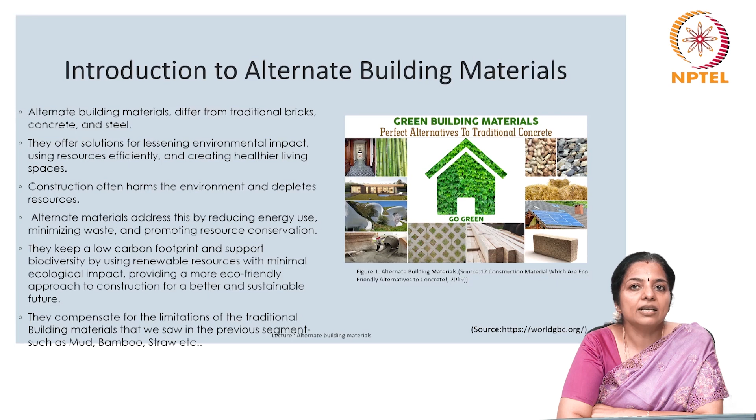These materials will help us reach carbon neutrality. They compensate for the limitations of the traditional building materials which we saw in our previous segment, such as mud or bamboo, straw, etc.

Now, why must we go for alternate building materials? Why should we do it? First, the market for alternate building materials is primarily driven by rising public awareness of environmental issues and new government regulations requires the use of sustainable building materials for infrastructure projects. So once you give an option to people or the client for building with sustainable building materials versus conventional energy-intensive building materials, the awareness is pretty high, especially because of the green labeling system.

In comparison to typical building materials, alternate materials have low carbon emissions and take less energy for production. That is because most of the time there is a large component in these building materials which is either waste or locally available. Either way, the end product is a low carbon emitting building material. They are therefore perfect as an alternate building material and are very environmentally friendly.

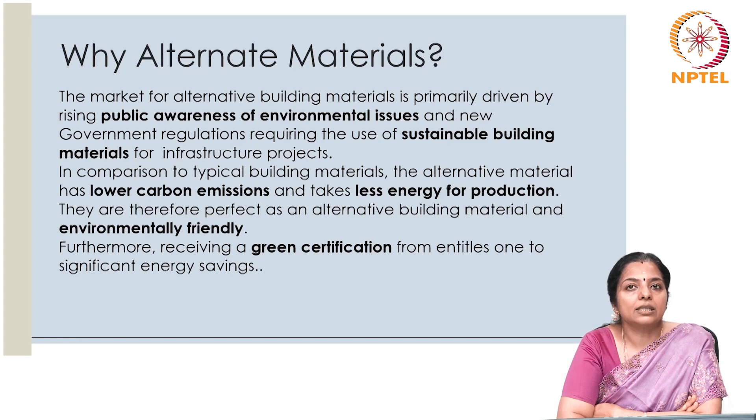Further, receiving a green certification from certifying bodies also results in significant energy savings. A combination of all this has really created a market for alternate building materials.

There has also been an increase in environmental awareness around the world due to climate change, which we face on a day to day basis. We see sudden downpours on cities, the clouds literally standing over cities and pouring down, attributed to the urban heat island effect, which again is attributed to using urban climate as a heat sink, which is attributed to the design of buildings that are not climatically suitable, which again bounces back to the envelope building material, the walls and the roof. Therefore there is intense awareness about the building material choices we have to make, because these end up becoming directly related to climate change.

Now, in order to conserve natural resources and avoid adverse effects on climate by using materials that emit ozone-depleting gases while manufacturing, or which are very carbon intensive, we must, in addition to alternate building material, also consider green materials that are relatively eco-friendly.

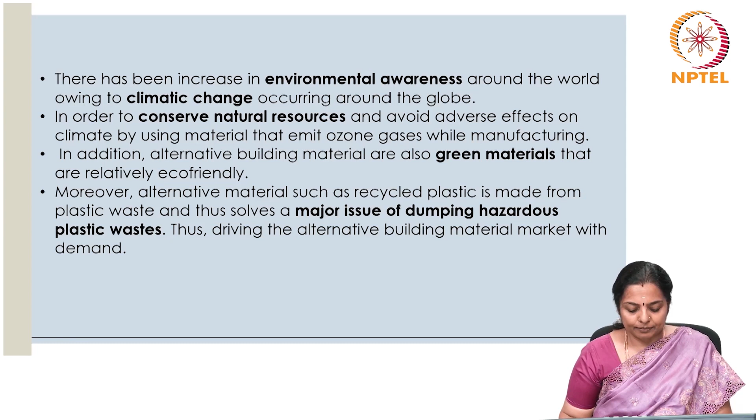Now, the alternate building material market demand is segmented on the basis of materials, end user, application, and region. In general, there is a demand for alternate materials with time for the reasons we have already seen. In the construction industry, there is a projected rise in demand of alternate building materials between the year 2020 and 2030.

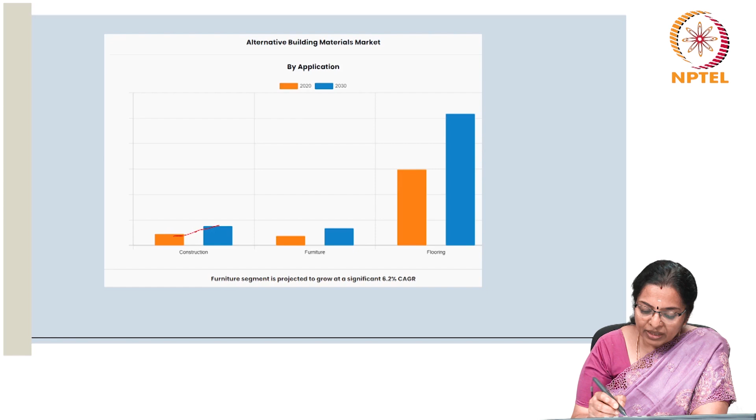The furniture segment is also showing a rise in demand. With respect to a particular component, the flooring element is also showing a significant demand in alternate building materials between the year 2020 and 2030.

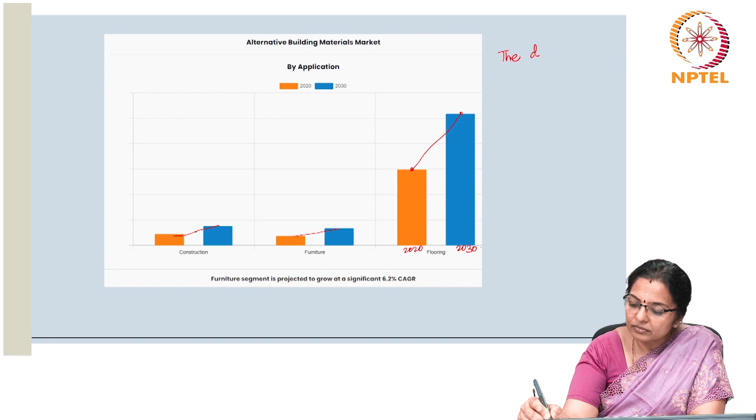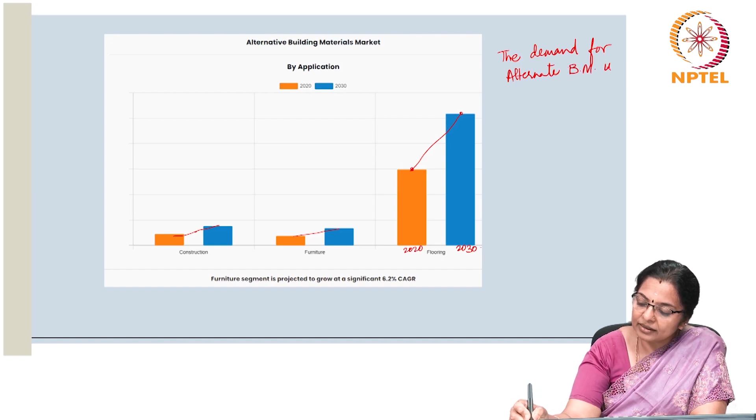So we can confidently say that the demand for alternate building material is rising year on year. We established that.

Now let us look at how these alternate building materials are classified. There are three ways in which we can look at alternate building materials.

First is natural materials. In combination with modern materials, natural materials are used as a composite. So it is not just purely mud, but mud with cement, which means it is a combination of a traditional building material and a modern building material. When you do this, you reduce the limitations of using only natural materials, and therefore its limitations in terms of strength and durability can be diminished.

For example, bamboo, a versatile and fast growing grass, is known for its strength and sustainability, but it has other weaknesses in terms of its durability over time, because whatever said and done, it is an organic material. So we can use modern technology to reduce the impact of its questionable durability. Rammed earth involves compacting natural materials like mud or soil to create sturdy structures.

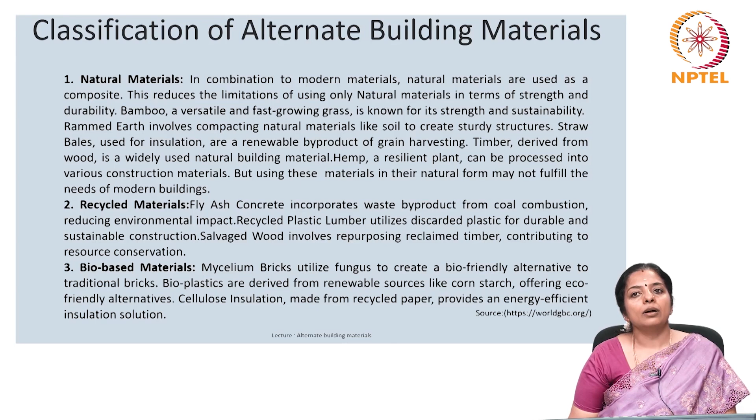Bioplastics are derived from renewable sources like cornstarch and offer eco-friendly alternatives. Cellulose insulation, made from recycled paper, provides an energy efficient insulation solution.

Let us look at some of the examples.

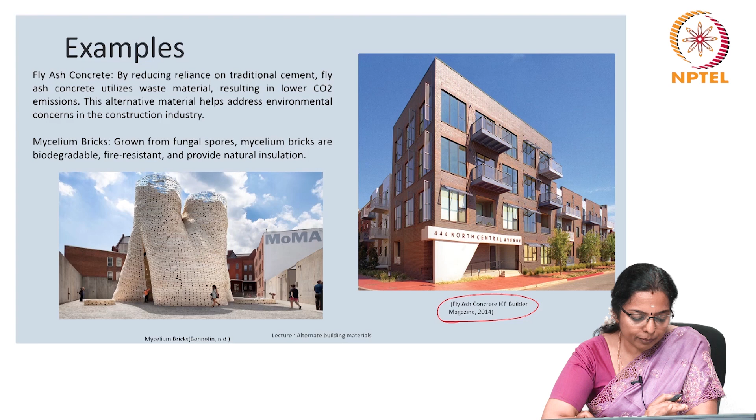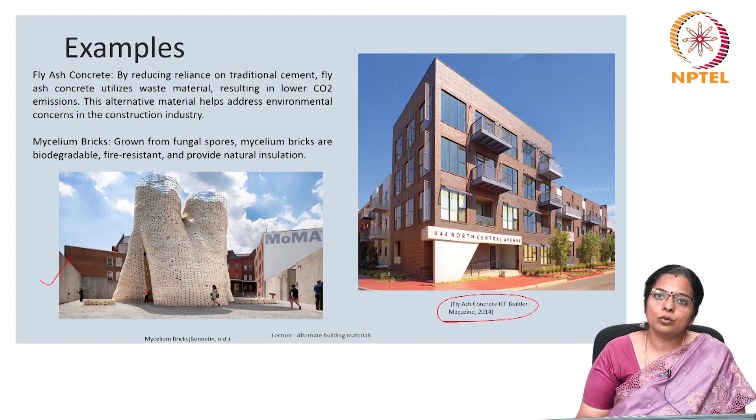Mycelium bricks are grown from fungal spores. They are biodegradable, fire resistant, and provide natural insulation. There are structures made of mycelium bricks. For example, this installation is made out of mycelium bricks, and it is only a question of time before we can bring it into the mainstream building industry.

Now, let us look at the most important aspect that we need to understand and follow, which is carbon neutrality or carbon negativity. What are the characteristics of these alternative building materials?

Carbon negative building materials are a pioneering innovation in sustainable construction. These materials represent a pivotal shift from traditional counterparts, actively capturing and storing more carbon dioxide than they can emit throughout their production and life cycle.

These are sourced from renewable and sustainable resources, and these materials minimize the environmental impact by prioritizing low embodied carbon and adhering to circular economy principles, thus emphasizing recycling and minimal waste.

The integration of innovative technologies such as carbon capture and utilization further enhances their carbon negative characteristics. Durability is a key focus, ensuring that the captured carbon remains sequestered over an extended period. Rigorous life cycle assessments validate their net carbon impact, providing transparency and accountability.

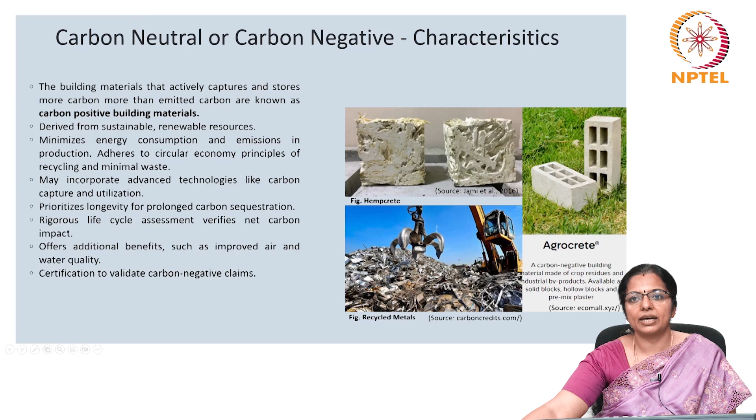Let us look at the advantages of alternate building materials. First is improved health and well-being. Alternate building materials offer several advantages. Firstly, they contribute to improved health and well-being, as many of these materials are non-toxic and sometimes even breathable. They create a healthier indoor environment for the occupants.

Secondly, these materials enhance energy efficiency by providing improved thermal insulation, thus reducing the need for excessive heating and cooling energy. Additionally, they open up possibilities for integrating renewable energy sources into construction.

Thirdly, alternate materials often exhibit excellent structural and functional properties, enhancing the durability and overall performance of buildings. Lastly, these materials bring unique visual characteristics to construction projects, allowing for innovative and aesthetically pleasing design solutions, more so because they do not follow the regular aesthetics of modern and conventional buildings.

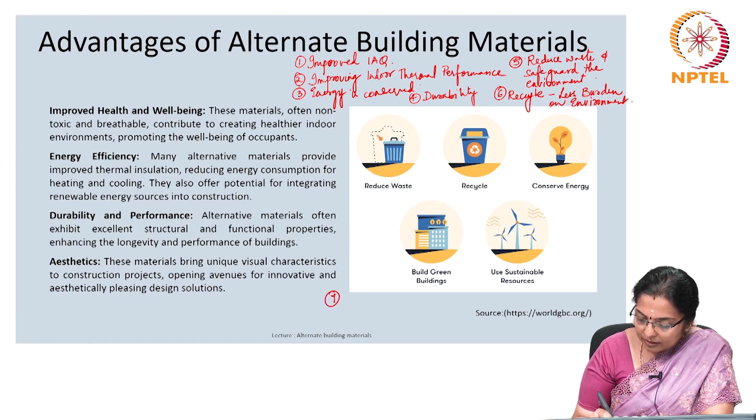Also, it can be an innovative approach for green building certification, and definitely a step towards going carbon neutral.

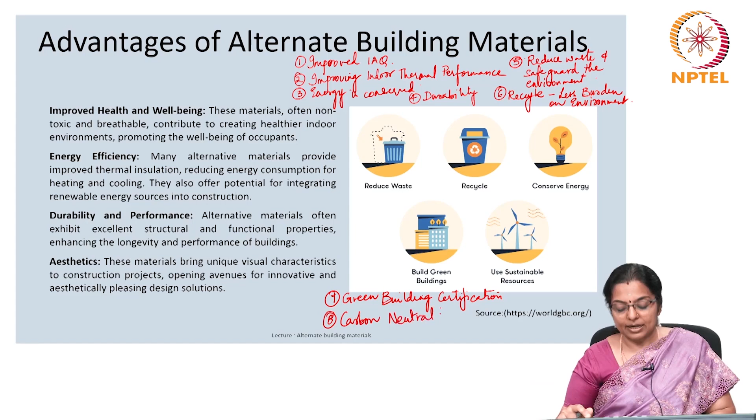So, these are the advantages of using alternate building materials. While its disadvantages can be the cost, limited availability, lack of expertise to construct these buildings, and impingement of building codes and regulations, which may not be too accepting of something very new.

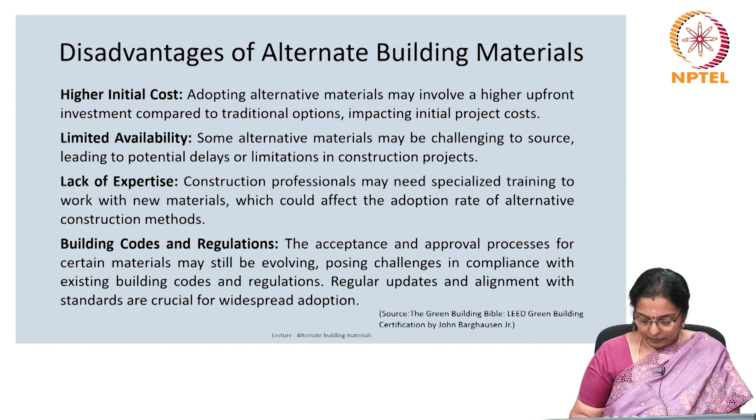Now, let us look at the environmental aspect of alternate building materials, because it's the focus of the course. Alternate building materials play a very crucial role in promoting sustainability in construction. They contribute to reducing the carbon footprint of buildings by having lower embodied energy and showcasing carbon sequestration capabilities.

They also support the creation of environmentally sustainable structures. These materials also promote resource efficiency by utilizing recycled content and renewable resources, thus optimizing the use of resources and aligning with eco-friendly construction practices.

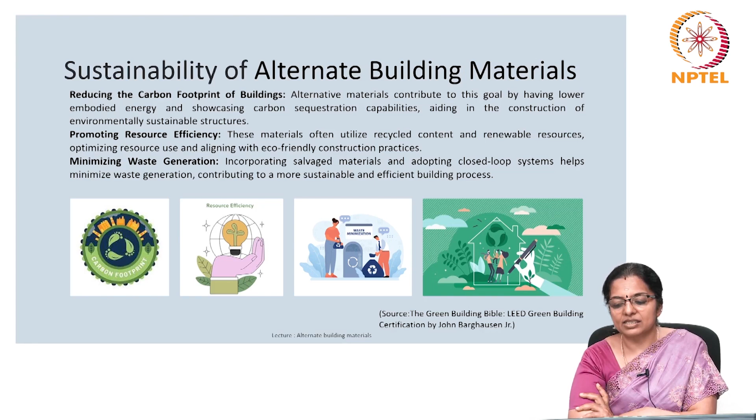Additionally, incorporating salvaged materials and adopting closed loop systems help minimize waste generation, further contributing to a more sustainable and efficient building process. So, in terms of sustainability, the gist is that these building materials help in reducing the carbon footprint of the building. They help in promoting resource efficiency because of the recycled content, and they promote minimizing of waste generation, because materials which are dumped as waste are salvaged and brought back into the loop of usage.

We will quickly see case studies of alternate building materials in general. Now, the Indian Plywood Industries Research and Training Institute, IPIRTI, actively promotes bamboo in its construction, emphasizing bamboo lumber as a processed and treated bamboo variant which is suitable for structural purposes in building of homes.

Additionally, in Hyderabad, a unique initiative involves recycling plastic waste to construct a studio, replacing traditional bricks. This studio stands out for being fire resistant, heat resistant, and waterproof, presenting advantages like reduced noise compared to regular houses. Despite a slightly higher construction cost, this project demonstrates efficiency with a shorter construction time, thus showcasing innovative approaches to sustainable and resilient building practices.

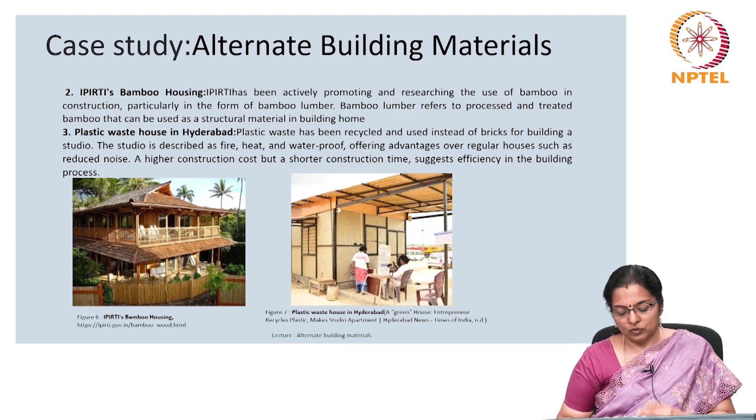So, these two buildings I have taken, the first one being the IPIRTI, where they tried to combine bamboo with some modern materials to create even a two-storied structure, and the second one being a plastic waste house in Hyderabad, which is again a green house, an environmentally sustainable house.

Let us quickly look at the future trends in construction using alternate building materials. Future trends in construction showcase very many innovations. Biofabrication explores growing building materials from microorganisms and fungi, like how we saw mycelium, introducing sustainable practices.

3D printing as a technology can revolutionize construction by creating intricate structures with minimal waste and increased customization. The so-called ink used for printing, which is actually a building material, is also another area where intense research needs to happen, incorporating alternate building materials.

Adaptable and responsive materials pave the way for buildings that can adjust to environmental conditions, enhancing efficiency and sustainability. Smart materials integrated with sensors and actuators bring intelligence to building components, allowing self-monitoring and optimization. These trends signify a shift towards a more sustainable, efficient, and technologically advanced building practice, shaping the future of the construction industry.

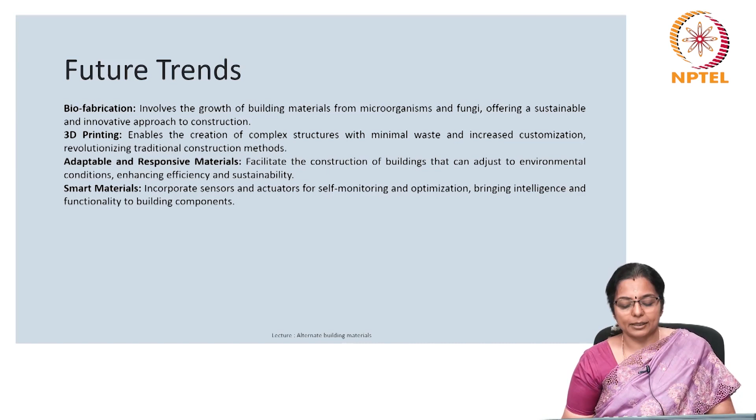To summarize, alternate building materials such as bamboo, rammed earth, and recycled plastic lumber provide sustainable solutions by reducing environmental impact and promoting resource conservation. They offer advantages such as strength, insulation, and fire resistance. Despite some challenges like initial costs and limited availability, these materials address traditional construction industry issues as well.

They contribute to energy efficiency, improved indoor air quality, and innovative designs. Real world examples like bamboo framed houses and plastic waste studios demonstrate successful implementations, signaling a transformative shift towards a greener and more resilient construction future.

In the next few classes, we will be looking at each alternate building material in detail, and what we saw today was a gist or an introduction to alternate building materials.